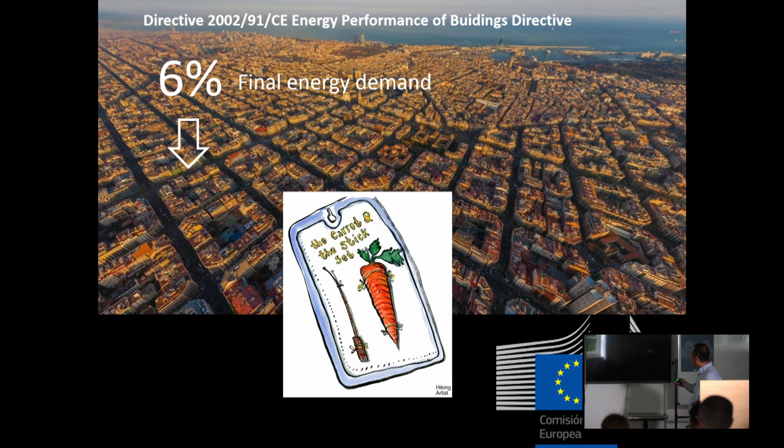On the hand of the mandatory policies appeared almost 14 years ago the concept of the near to zero energy buildings. What is exactly a near to zero energy building? You should be aware, because now it is mandatory that all new premises to be delivered must accompany this definition. Do you have any idea? Professor Navoni, you have perhaps the best opinion here.

Never heard of it. No.

So let's say that zero energy building or nearly zero energy building has been the target until 2-3 years ago. Hard to achieve, and it's been a bit reductionist because every country then developed a simple Excel to get to the numbers, but the big ambiguity of the system was that what you calculate with this simple Excel is very different from the real consumption of the building.

But I guess that for 2030 there is a plan to have all buildings as zero energy buildings or carbon negative, so that they absorb and sequester more carbon from the atmosphere than the carbon that is emitted. There is also a shift from energy to carbon. I think the target is changing, so also as architects we change our topic much more to talk about emissions rather than energy that is used.

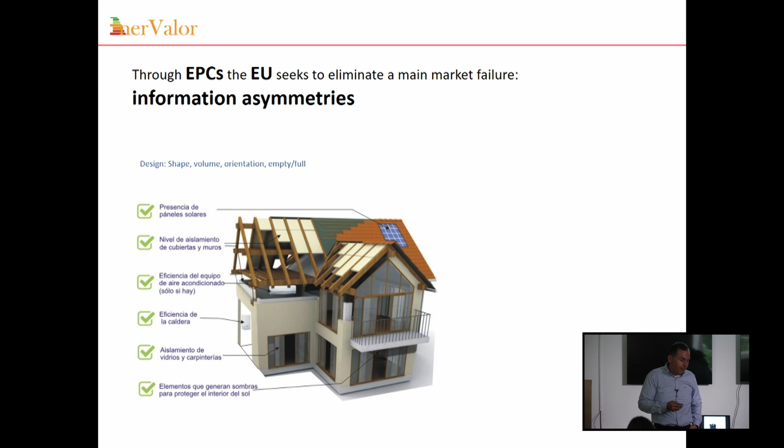So normally people are not aware of this, and that's why the European Commission thought that by providing an easy to understand rating, providing information on how many kilowatt hours a home will consume, in theory, as Professor Marmolejo said, using a model, not necessarily measuring the consumption, people will be aware of the energy bill. But also, providing the CO2 emissions, they will be aware of the pollution the home is producing.

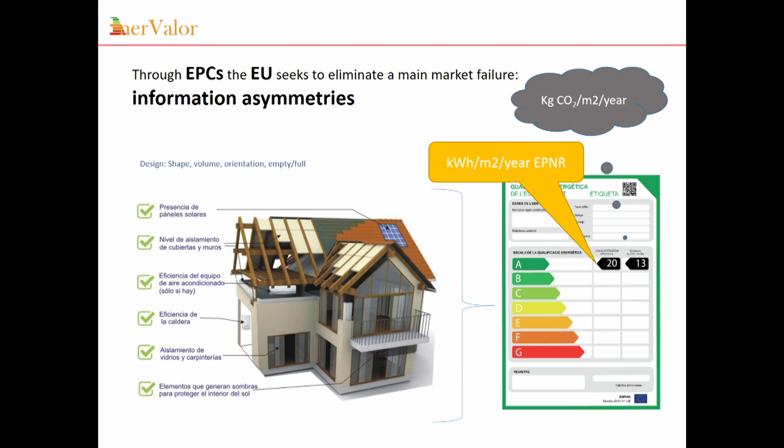Normally, people do not make the relationship between the CO2 emissions and homes, because they don't see any machine working like in a car. For example, if you ask people, do cars pollute the atmosphere? Of course, the answer is yes. But if you ask, is this small cottage, super well designed, producing any effect on the atmosphere?

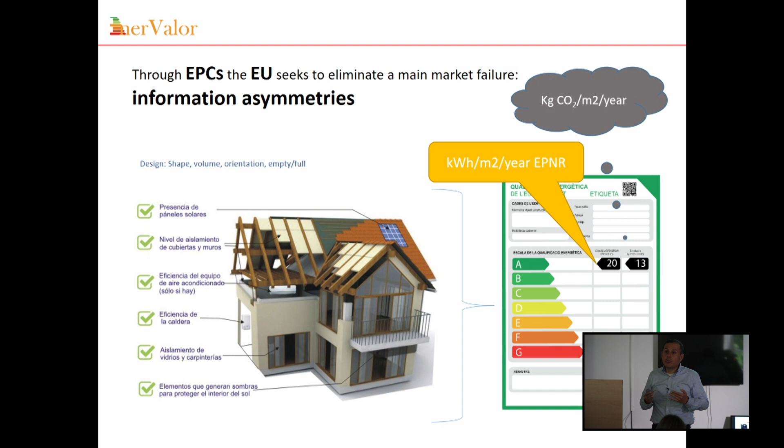They will be dubitative. I mean, the answer will be no, for sure. So the idea was to provide information. So the economist says, when the environmental quality increases, because you are increasing the performance of the building, that means that you are saving energy. It automatically translates into spending less money on your monthly energy bill.

But also, you can provide more motivations to people to be more satisfied with more ecological stuff. For example, do you have any reward when you help somebody to do something? For example, if there is a blind person trying to cross the street and you help them, do you have any reward? A psychological reward for making this good action? Or are you completely indifferent? What would you say?

Of course, at least they will thank you. And maybe with this thank you, you will feel a kind of satisfaction. Well, people also, when they consume less polluting stuff, have a kind of psychological reward because they feel that with their behavior they are helping to preserve the environment, despite that it's not true. But this is a psychological reward.

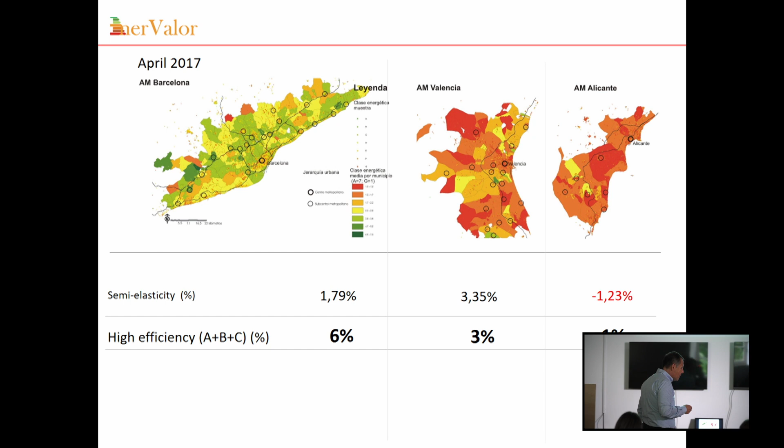After we analyzed what happened in Barcelona compared with Valencia, the 3rd metropolitan system in Spain after Madrid and Barcelona, which are more or less equivalent, and Alicante, another metropolitan system. We arrived at the conclusion that the premium was lower in areas where the housing stock was less performing. So it was not the same in different cities, in different parts of Spain.

We also tried to answer the question of whether the market premium, this green premium, was the same across different housing submarkets. We identified a market in central areas, such as the enlargements of the cities, where the very affluent, well-educated population lives and pays a lot for an apartment. But also a market made of new buildings, state-of-the-art, located in the outskirts of cities or areas being transformed, for example, manufacturing transformed into housing, exhibiting every kind of facility—swimming pool, heating, air conditioning, terraces—completely adapted to the requirements of contemporary households.

And the largest part of the stock was housing built after the Civil War—not the Second World War. Spain was not within that conflict, it was a third party. But after the Civil War in Spain there was a huge migration from the countryside. Barcelona and Madrid were more or less like Cracow and Warsaw—smaller cities—and they were transformed into super large metropolitan areas in just 20 years. Most of the people coming to the cities to work in manufacturing ended up in very poor performing homes located in neighborhoods in the outskirts of the cities.

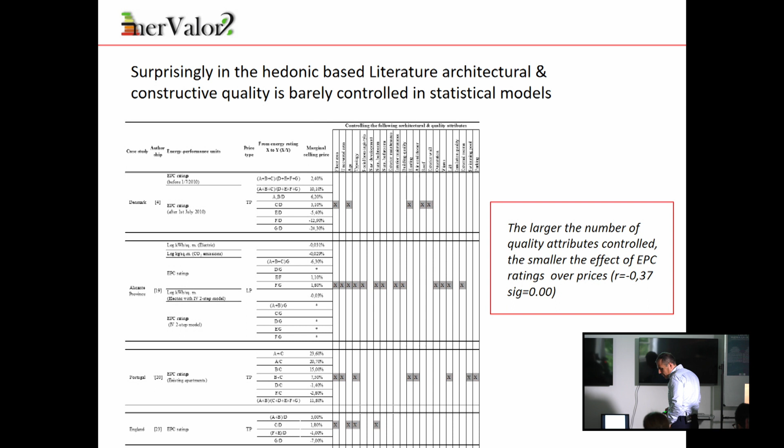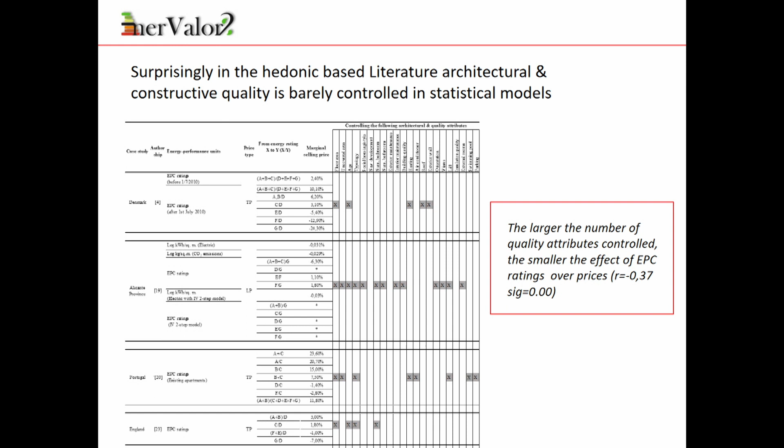So basically what we did—I'll skip this part—is to see if in the extant literature, the previous studies, researchers were controlling for the quality of the home. Quality means the finishings, the layout, the natural lighting, the views, the singular elements present in a home—for example a vault, or this roof providing quality to the space, related also to the overall quality of the building. We realized that most studies didn't take this quality into control in their statistical models.

So instead of looking away from the problem, we looked at it directly. We visually inspected many homes in Spain, in Barcelona and Madrid, the two main housing markets in the country, in order to capture this quality.

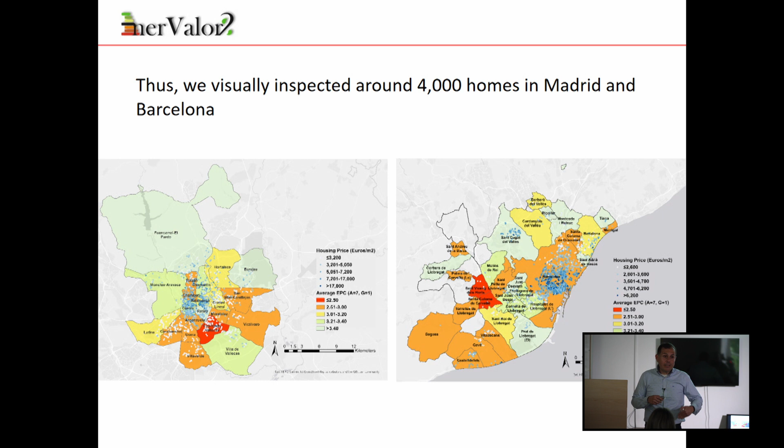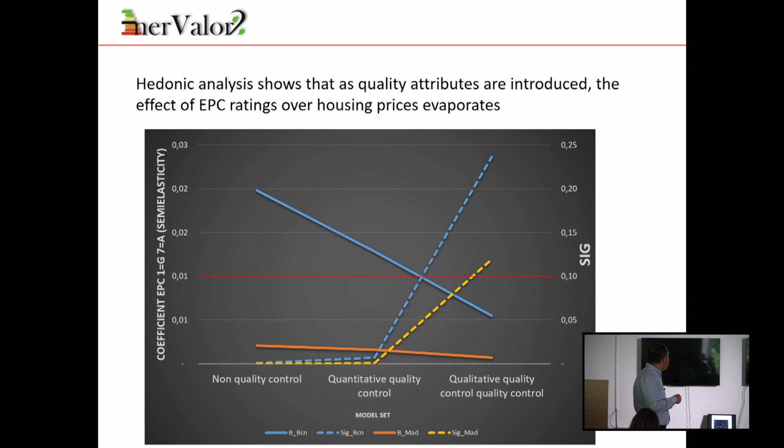As we introduced the quality of the homes, the effect, the impact of energy performance on prices was disappearing—it became non-existent. So we arrived at the overwhelming conclusion that the European policy didn't have any effect on the Spanish housing market, which is one of the largest in Europe after Germany, France, and Italy. So the fourth largest market, in terms of economy, was not compliant with European policies.

This is a disaster, not only because of what Professor Naval said about the poor quality of the certificates, the incomplete realms being taken into consideration, but because the market was not reacting to that. If you properly consider the quality, if you isolate properly the quality of homes, there was no correlation between the prices and the energy performance.

So what we did next is inspect more homes. Of course, my students were doing this work. They were looking at the advertisements, looking at the bathroom, the kitchen, the living room, and taking an evaluation and assessment of the different issues. This is a lot of time-consuming effort.

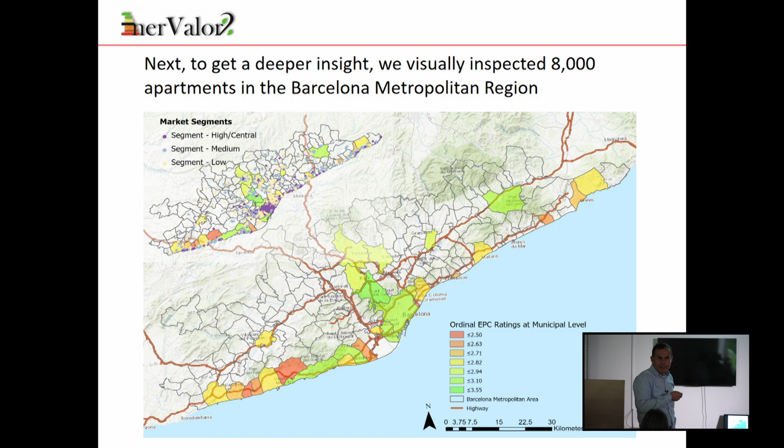Anyhow, my poor students went to inspect another 4,000 homes. They were really happy looking at the different flats within the city. Arriving at a larger sample, we discovered what is logical: only wealthy population was willing to pay for efficient homes. In general, there is no relationship between the prices and the energy performance.

But if we look into the detail, we can see that only the wealthy, well-educated people, who are sensitive to this aspect, are ready to pay a larger amount of money. That makes sense because they are more aware of environmental conservation. They have more cognitive resources because they have been trained more years in school, and they have developed such sensibilities.

Well, in the last 3 years, many things have occurred. What's your name? Christoph. For example, Christoph, what has happened in the last, let's say, 4 years? Not about your personal life, about society.

We started with the pandemic. We had a pandemic, and namely a lockdown. For the first time in the life of our parents or grandfathers, we have had a lockdown. That means that the knowledge level on housing conditions is larger after the lockdown than before, because people were enclosed in their walls. For example, have you gained any knowledge about your living conditions, Christoph?

And of course, the idea is that transforming this landscape, the conclusions on the relationship between energy performance and prices should change. In theory, if people are more aware of the energy bill because it has increased a lot, people should pay more attention to the energy performance. If people have also become aware of energy performance because a lot of public money is being invested in the retrofitting of homes, people are more aware of what exactly this is. So basically what we did is, again, repeat the analysis comparing 2020 and 2023,

and we arrived at the following conclusions. In Metropolitan Barcelona, 5 million people. First, that the outskirts of the city were gaining value more than the city centers. Because Barcelona has not only one center; the most polycentric urban system in Spain is Barcelona. That means that we don't have only Barcelona as the main CBD, Central Business District, but we have some sub-centers that also have a role in the metropolitan system.

So previously, as you move away from such centralities, the prices decline a lot. What we have seen is that this slope has been somehow flattened. What does it mean? That people are paying more for living close to nature. And living close to nature in Barcelona means, for example, living close to the sea. That is completely not affordable in the main city.

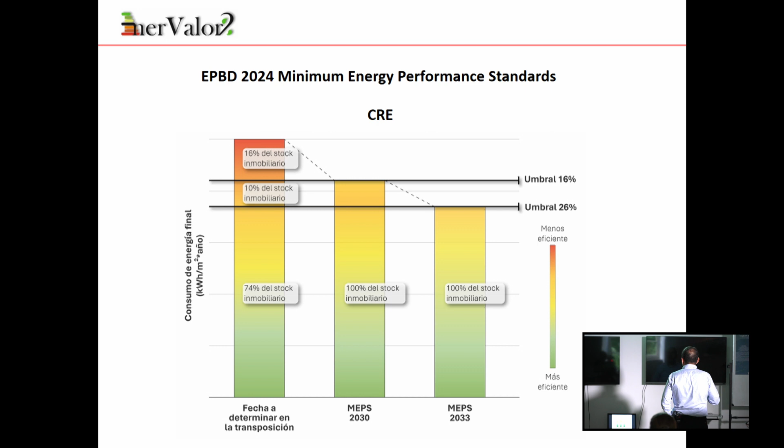In the case of housing, the new directive produced a more elongated in time, more separated in time policy, and it is less restrictive. But of course, retrofitting a building implies a lot of money, implies a lot of managerial stuff, and implies also permits and technical constraints.

I mean, it is not possible, for example, to retrofit a historical building made from brick. It is not possible to put the insulation that here in Poland you used to put, these external layers made from polystyrene that were installed in the communist-era buildings, enlarging the width of the walls. It's not possible to put this retrofit system in a historical building. Otherwise, it will lose the main architectural features of the facade. So it has constraints. It is not easy to go this way.

On the other hand, the worst performing homes are those of the poorest population. And the poorest population is the least able to pay for the retrofits. They have other priorities, for example, getting a job, educating their children, before retrofitting the home. So the question is, how is it possible that politicians in Europe have arrived at the conclusion that it is mandatory to retrofit the homes, especially in the case of poor people?

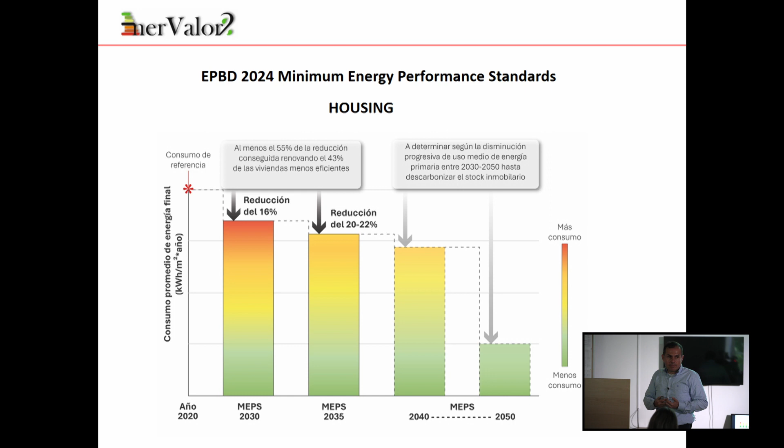One option is to put a lot of money to pay for the retrofit as a gift, to hire architects to design the retrofits, to hire lawyers to take care of all the permits and all the managerial stuff, and go to these poor neighborhoods and retrofit the homes. This is one possibility. But is there enough public money to be used in this realm?

Aren't there other priorities in Europe, such as education, innovation, health, or, for example, the aging of the population? Europe basically has a pyramid that is like that. Each time more people are retired. They are living with pensions, with money being paid without working.

So how can we achieve this goal of being the first continent in the world to be carbon neutral by 2050? That means that all the pollution we generate is absorbed by all the technologies, the stuff we put into the landscape. How can we go through this decarbonization?

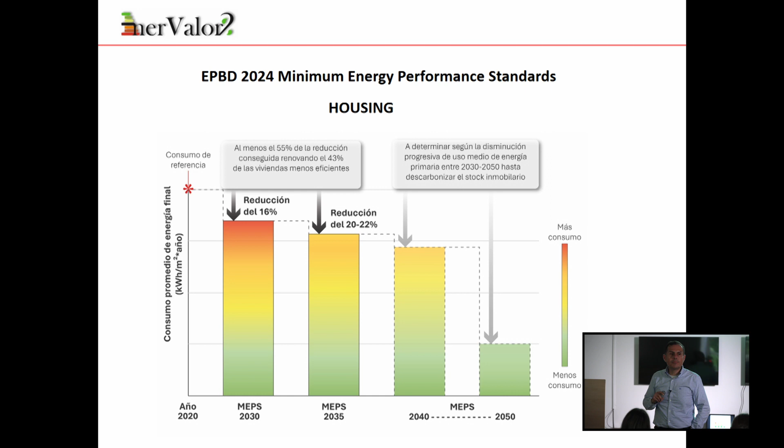And the question is how architects, who are only part of the whole value chain, can provide assistance to this real estate decarbonization. Of course, architects, as I have said previously, in theory have the knowledge to aid families to retrofit their homes, or companies to retrofit their buildings, architects or engineers, whatever they are. But also, we can play a role within the planning of the decarbonization.

I mean, the retrofit need not be achieved from one moment to the other. For example, the windows can be installed before the walls are insulated, and the equipment can be replaced at a different moment. So by making an economic plan of the retrofits, the housing stock can be progressively retrofitted. But of course, we have to be able to analyze which are the priorities. I mean, if I have many battles, which of them do I have to fight before the other?

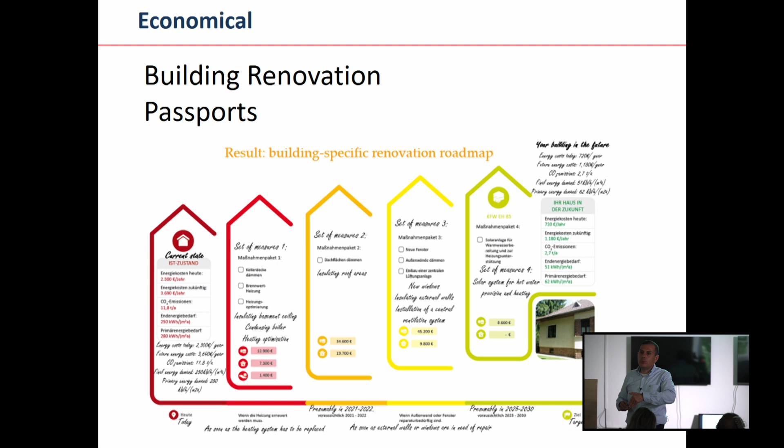And it's what is being tried in Europe with these building renovation passports. They are kind of roadmaps indicating the different stages of the retrofit, indicating the benefits, the savings, for example, in the energy bill that the families will have, and the cost, the investment they have to spend in each of the stages.

For example, when you design a building, do you do energy simulation to have an idea of the translation of this design into energy consumption, and transform this energy consumption into money? Which software do you use?

Emmanuel, in my school they use EnergyPlus, but I don't know if it's the software that is state of the art. I was in the developer team of EnergyPlus in America. EnergyPlus is still the primary engine for Ladybug Tools all over. I would say that, yeah. Also the Spanish certification partly relates to that.

Do you use EnergyPlus in your, let's say, environment classes or technological classes? Ladybug? Or Ladybug and Rhinoceros? Honeybee, do you know Honeybee? So there is Ladybug, Honeybee, and Dragonfly. Honeybee is based on EnergyPlus. It's an interface for Rhino.

So you have 1.5 years to learn this, because it's necessary to have an idea of the implications. What happens if I change the windows, with the energy performance, what are the implications on the cost. I'm talking about this because maybe you are thinking that your future work is in new premises, new buildings, and it is not in that realm.